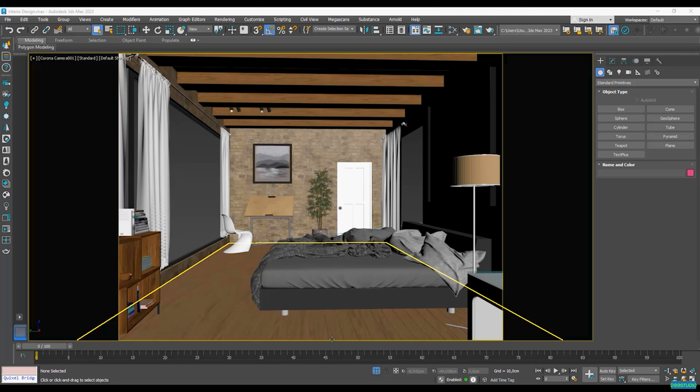Hello, let's learn how we can apply a background to our interior scene. Now first of all, let's go to our render setup. Now let's go to our scene, and in here we will see the noise limit. So when we start rendering, and not an interactive render but actually rendering our final image, we have to tell it the noise level limit until which it's going to render.

So a good noise level limit is between 3 and 5% for final production. Now if you just need it as a draft, I'd say 8 to 10% will be fine. So let's go ahead and type in 5% for this example. Also down here we will have the denoising. What the denoising is going to do is basically reduce the noise from our image. So for this, we're going to just go ahead and select the Corona High Quality. The amount is going to be fine at 0.65 and the radius at 1.

Now let's go into the Common tab. Here you can see that we've locked our aspect ratio. So we have a 1500 by 1125. For final production renders, it's best if we just set the longest side, which in this case is our width. Let's use 3000 pixels, and if your aspect ratio is locked, the height will automatically follow this value. Now, this will dramatically increase your rendering time, so it's better to leave it at around 2000 for now. So we're going to be rendering a 2000 by 1500 pixel image.

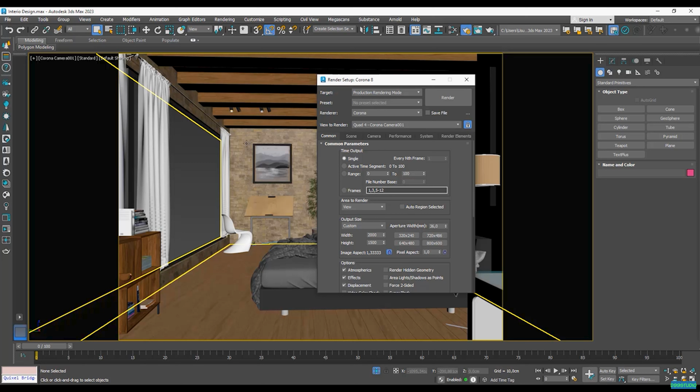In order for us to integrate an image for our background, we first need to find that type of image. The best method to do that is to take our image to Photoshop. In Photoshop, we're going to be applying a background, which we will then import to our Corona renderer for us to render it with our whole 3D model here. So it's better for us to do it rather than for me to be explaining it so that you can understand it better. So once all of these settings are ready to go, we're going to hit the render button up here. It's no longer an interactive render, it's just a render. So let's go ahead and render this image.

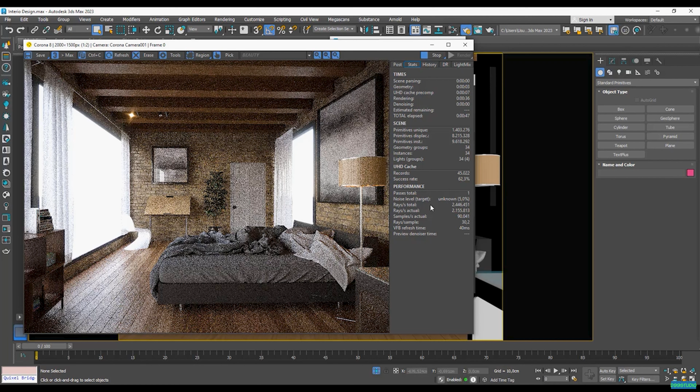The rendering engine for Corona renderer is based on our CPU capacity. So the time of rendering will depend on your CPU. So if we go to the stats tab, we can see here the noise level. So more or less, we should be able to have an estimate of the remaining noise level in the image. So I'll come back when this is done. So I actually stopped my render at 6.4% noise level. Now the reason behind this is because we have to first add a background before we go all the way.

So let's just save it. Let's make sure to save it as a PNG, and let's just choose the type. I'm going to go for a PNG. Now this is important that you do this because we have to add a background. I'm just going to name it background and choose the preferred folder that you would like to save this in, and let's just save it. Now in here, again, because it's not our final render, the RGB 24-bit is more than enough. So let's just hit OK. Alright, now let's go to Photoshop. So here's my PNG. I'm going to right click and open with Adobe Photoshop.

Okay, here in Photoshop, we can see that we don't have any background. So we need to find an image on the internet that will go along with our interior here. So let's go and find one. Now a website that I recommend is stocksnap.io, because the images here are not under any copyright license. So we can use them for free. Because we're doing a rustic design, it'll be nice to have a green field background on it. So I'm just going to type in green field.

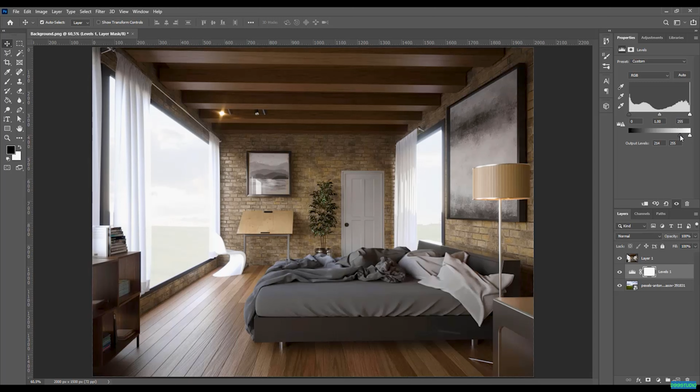Now, what I want to do is just to save my background, which is this one. So I've just hidden my render with the eye icon. Now I just want to save this image so that I can import it to my Corona renderer. To do so, I'm going to go to File and Save As, and I actually want to save it on my computer. And this time I'm going to save it as a JPEG. So I'm going to go down here to JPEG, and I'm going to name it Background Ready.

Let's save it and make sure that the quality is at its maximum, 12. Okay, so sometimes we're going to have it at 10 by default. So let's just increase this all the way to 12. The baseline standard is more than enough, and I'm going to just hit OK now.

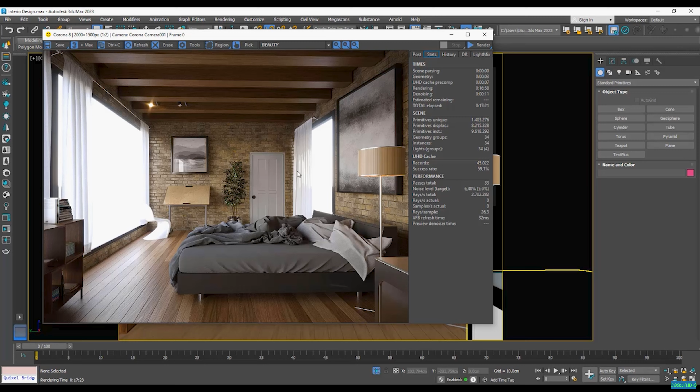Alright, so now let's bring this to our Corona renderer slate material. I'm just going to close this render, and I'm going to go to my material editor. Now I'm going to add another tab, and this tab is going to be named Background. Alright, so let's bring in that image that we just created. So for this, I'm going to go to my search by name, Corona bitmap.

I highly suggest doing this method. Let me show you something - if you notice, if I go to my materials tab, all of our textures are not Corona bitmaps, they are just regular bitmaps. There's not much difference between using a regular bitmap rather than our Corona bitmap, but it's better if we just work everything with the settings from Corona.

Now let's go back to background. Within our Corona bitmap, we haven't chosen anything, so let's double click it. Down here we have the bitmap option. I'm just going to click load map and let's find our image.

Now I know it's this one because we saved it as background ready. Notice that in the environment mapping, our Corona bitmap is mapping this image already - we have to change the mode from spherical to screen because it's just a flat image, not actually an HDRI. HDRIs are actually just 360 images, and in our case we just used a JPEG 2D image, so we have to choose the screen mode here.

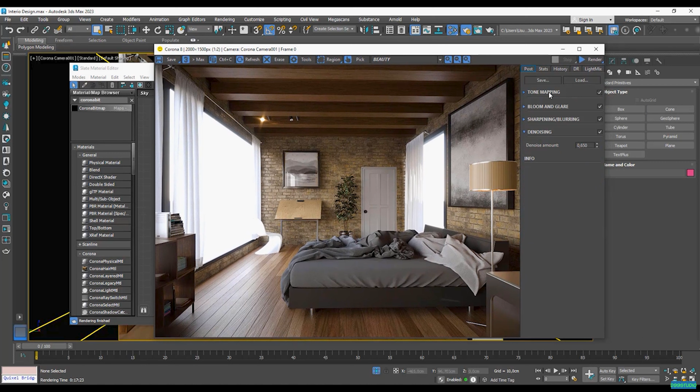Now, one thing we have to keep in mind is that we've edited this image without using the Corona tone mapping. So let's go to our frame buffer - inside our render setup, let's go to scene and show frame buffer. In here, if we go to our post tab, we can see our tone mapping. Because we edited this image by itself in Photoshop, once we plug it in so it can appear in our actual render, it's also going to acquire the tone mapping options - it's going to have higher contrast, highlight compression, and so on.

But we don't want that. We want to cancel these tone mappings because we have already edited this image in Photoshop. So to tell Corona renderer that we don't want to use these tone mapping settings with our Corona bitmap here, we need to call in a Corona tone map control. This component is actually going to control the tone mapping that we've applied here.

Here we have that this tone map control will be affected by its exposure and the tone mapping. So we only have to uncheck these two values, because the exposure will basically just burn our image since it already has lots of light on it. If we open the preview window, you can see that the light is pretty high. We don't want this to be affected by the exposure or the tone mapping here, so let's just plug it in like so.

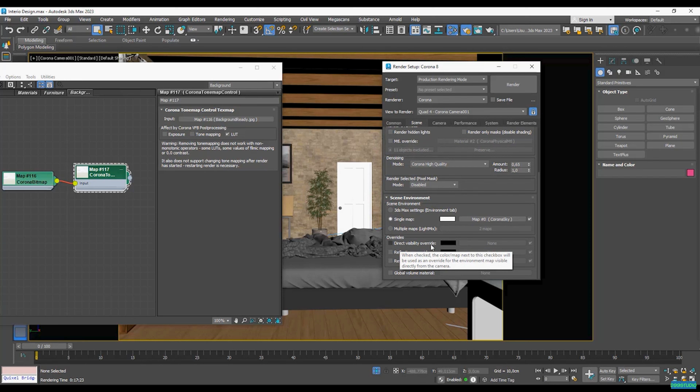Now how do we add this to our render? Let's close this and go to our render setup, and within our scene tab, if we go down here, we will see that we can override these maps - for example, we have the direct visibility override, the reflections override, and the refractions override.

Remember we were talking about refraction - when light passes through a surface such as glass or water, it's going to bend itself. What we want to see is our actual background that we just created in Photoshop. That's why we need to put it in the refractions override, because we want to see it after it has passed the glass. I can just drag it in like a Corona sky into this option right here, tell it to instance this, and press OK. Now let's start an interactive render.

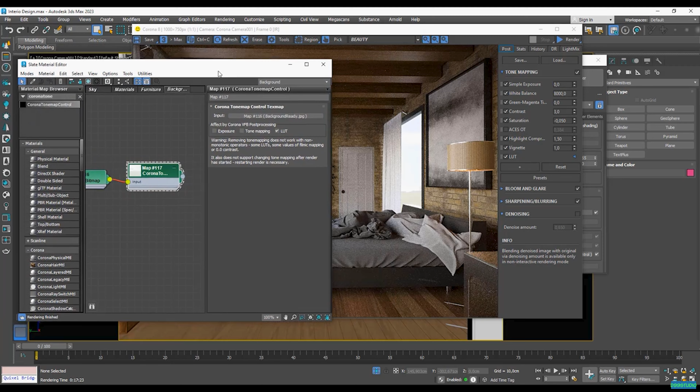Okay, so this is something we obviously don't want, and what we need to do right now is just lower the refraction on our glass material. Let's go back to our slate material, double click on our Corona physical material - here the index of refraction is at 1.5. One thing to keep in mind is that the index of refraction for glass, for a window, is around 1.1. So let's type in 1.1, and now let's start our interactive render again.

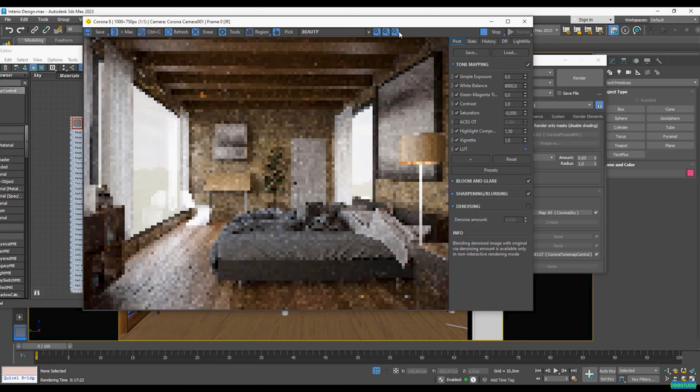Alright, so this looks much better. So this is the end of this lecture - make sure to try out your own backgrounds and adjust them in Adobe Photoshop. For the next lecture, we're just going to be talking about importing high quality 3D assets. So I'll see you then. Bye bye.